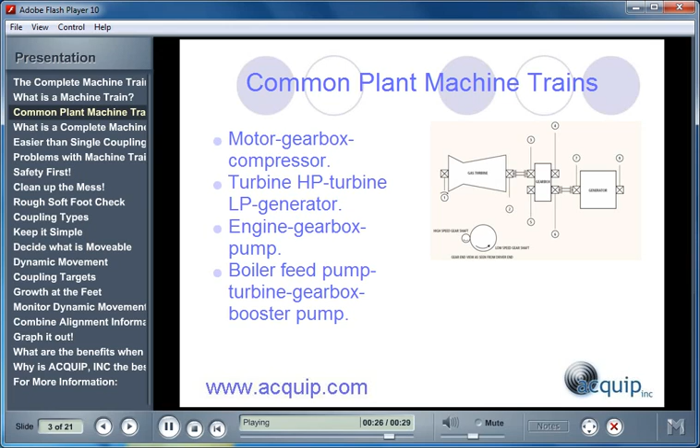So now that we know what a machine train is, what is a complete machine train alignment? A complete machine train alignment considers the machine train as a whole. It considers alignment targets from the manufacturer, or alignment targets calculated by measuring dynamic movement. When we do the alignment, we employ the fundamental alignment principles to ensure proper shaft alignment.

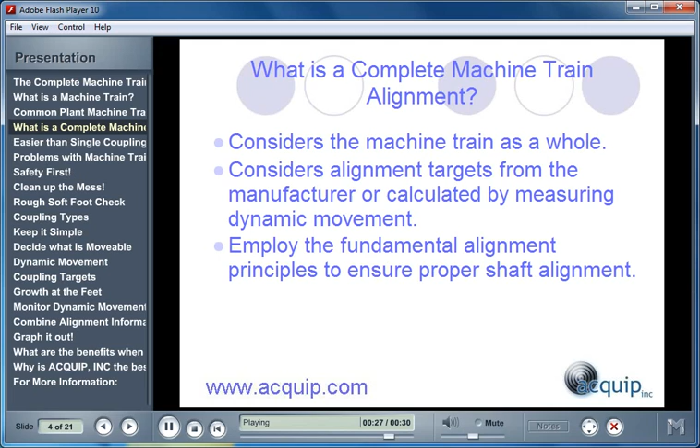Machine train alignments don't have to be exceedingly difficult. If you use the proper techniques, machine train alignments can be easier than a single coupling alignment. This is because you have options. You have more options on what can be moved, because when you do a machine train alignment, you're moving points rather than moving machines.

Problems people usually have with machine train alignments are getting bolt bound or base bound, because they start on one end of the machine and align all the way down in succession. By the time you get to the last machine, you have a move that's either impossible to make horizontally because you're bolt bound, or a down move that can't be made because you're base bound.

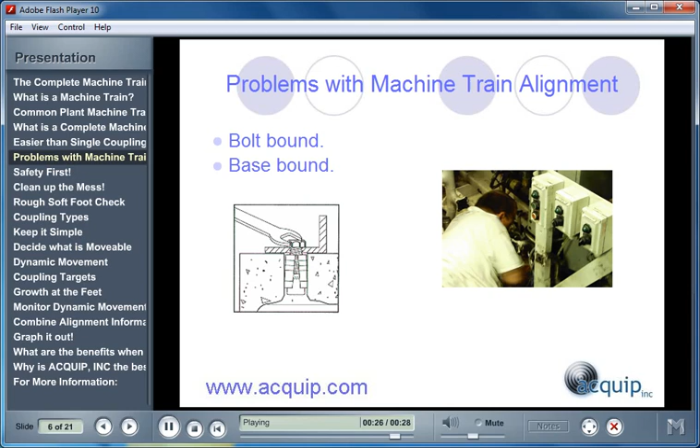Safety is our #1 concern when doing any alignment. So whenever you start an alignment, make sure that the machine is locked out and tagged out. Make sure that you see for yourself that the machine is locked out and tagged out. Never take anyone else's word for it.

Spending a little bit of time on the front end of an alignment, cleaning up, can save you lots of time on the back end when you're trying to make a final move. Remember to remove all the dirt and grease from between the feet and the base plate. Remove or replace any rusty shims, and check for foreign objects underneath the machine that can get wedged between the bottom of the machine and the base.

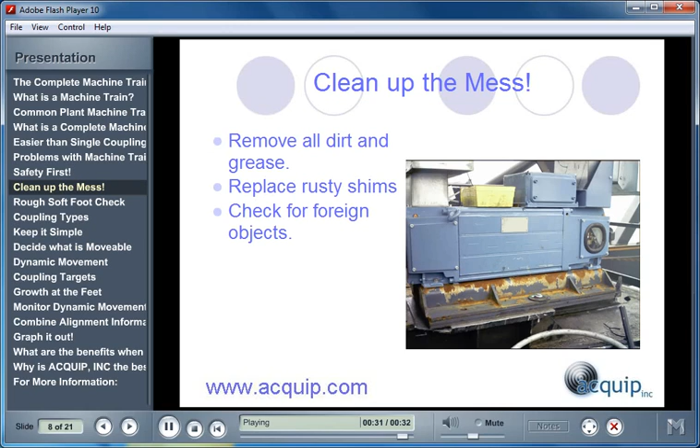Perform a rough soft foot check. To do this, you loosen all the hold-down bolts, and then you fill any obvious gaps with shim.

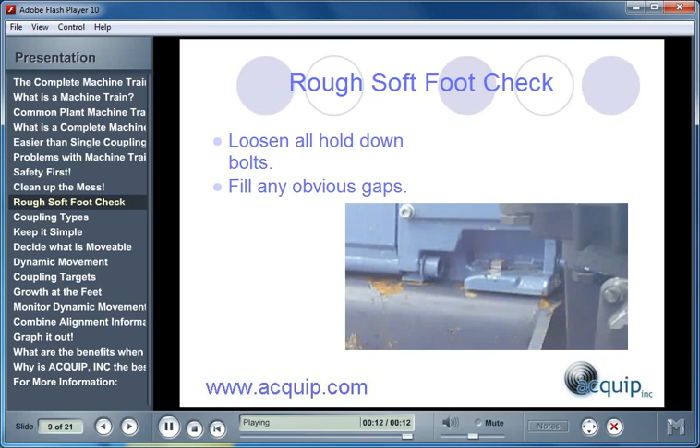Recognize the coupling types of the machine that you're working on. You have to know before you take measurements whether it's a rigid, a flexible, or you're dealing with a spacer shaft or a jack shaft.

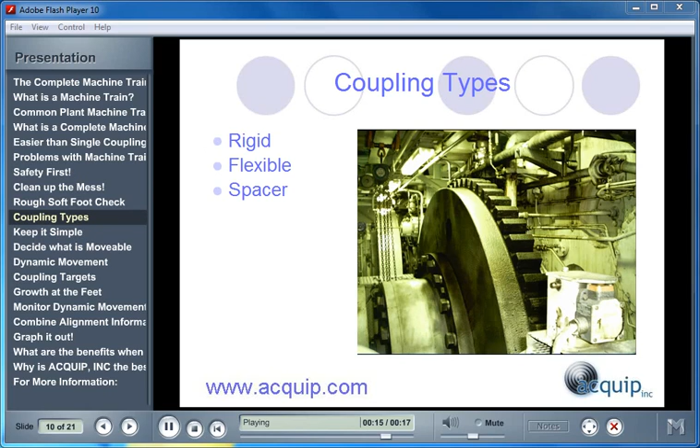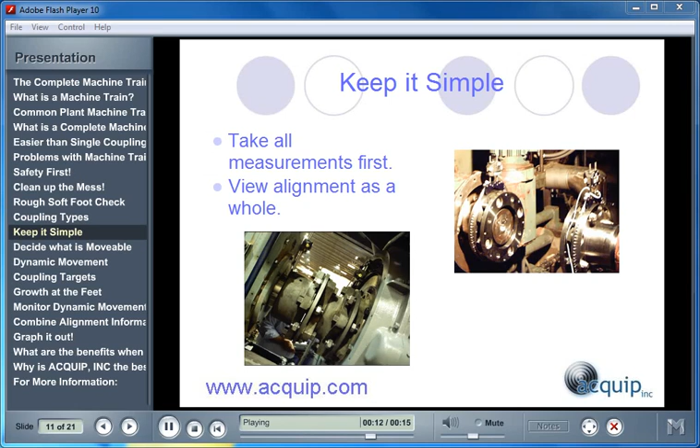Don't make the machine train alignment more complicated than it has to be. Keep it simple. Take all measurements first, then view the alignment as a whole.

When viewing the alignment, you have to decide what is movable. You want to fix points, not machines. Now, obviously, there's always going to be some points that you have to leave fixed because of piping. But maybe you could move that point a little bit, a few thousandths, and be able to solve the alignment problem of an entire machine train. And remember, horizontal and vertical fixed points can be different - they don't have to be the same points.

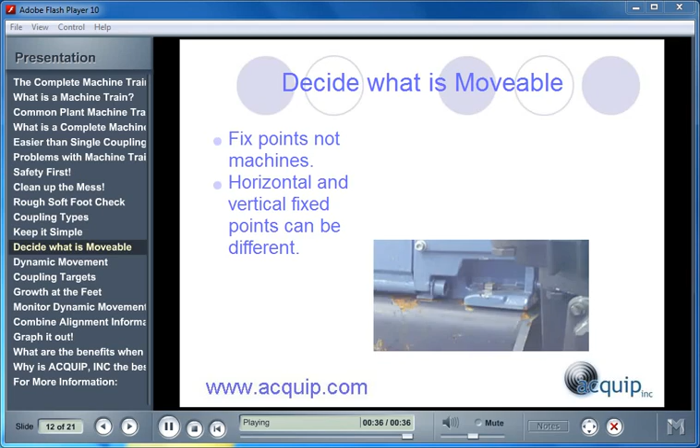Before making any machine moves, we have to consider dynamic movement. We want to consider the coupling targets, any calculated thermal growth at the feet, and any measured changes we have of hot to cold or cold to hot alignment across the coupling.

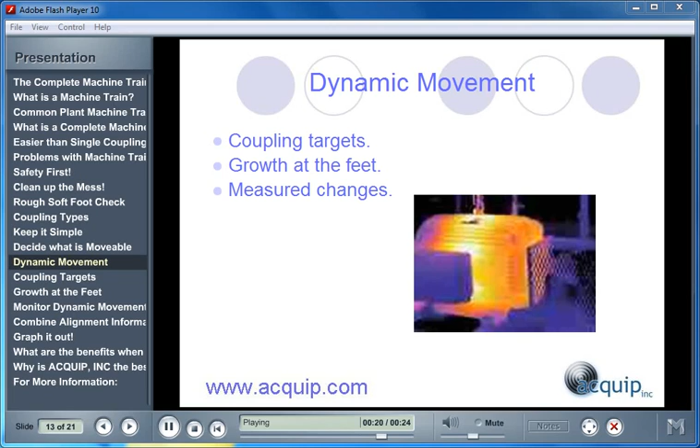Coupling targets come from a few different places: from the coupling manufacturer, from the machine manufacturer, or sometimes you even have in-house specifications for coupling targets.

If you don't have any coupling targets, it's best to do a theoretical calculation. This is calculated as thermal growth at the feet of the machine, because that's where you'll actually make the alignment move. You need to know the material constant of the machine, the distance between the center of the shaft and the machine feet, and the change in temperature from when it's cold to when it's hot.

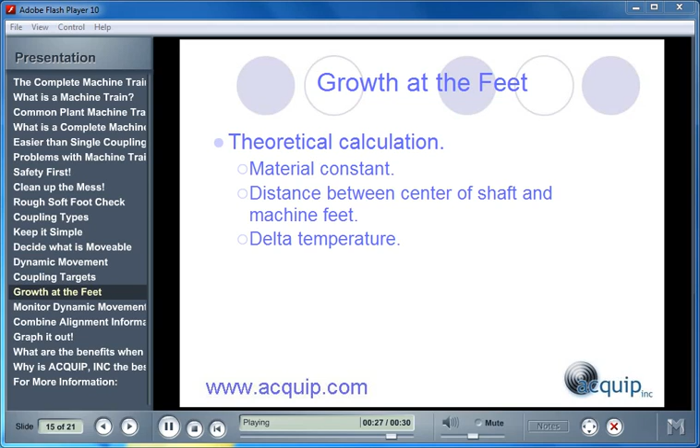Instead of using a coupling target or theoretical calculation, the best thing to do is to measure your dynamic movement across the coupling. This is done by monitoring it at the bearing brackets and being able to actually see how the alignment changes from cold to hot or from hot to cold.

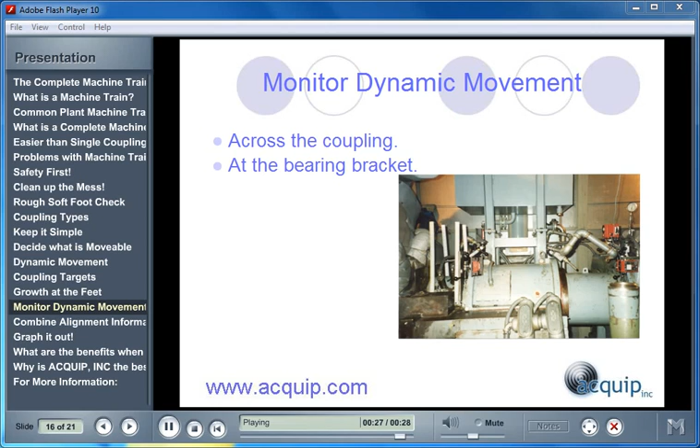All of this different information is combined: the misalignment readings, the coupling targets from the manufacturer, from your in-house specification, or from the coupling manufacturer, and any measured dynamic movement that you have. You combine all of this information together in order to get where you want to move the machine to.

The best way not to confuse yourself and to get the correct alignment information is to graph it out. You can graph your cold alignment condition, your hot alignment condition, and any calculated or measured changes, all on the same graph, and just count squares in order to see where you want to move your machine to.

So what are the benefits when using laser alignment for machine train alignment? A full template of the machine train is entered into the computer so the machine train can be looked at as a whole rather than each coupling at a time.

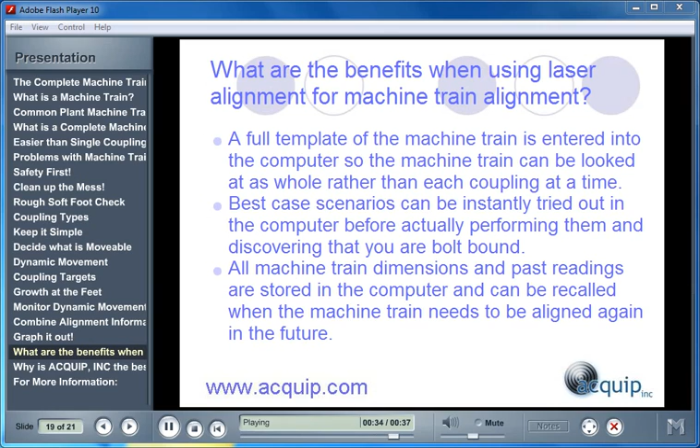You can look at best case scenarios instantly to try out in the computer before actually performing them and discovering that you are bolt bound. All machine train dimensions and past readings are stored in the computer and can be recalled when the machine train needs to be aligned again in the future.